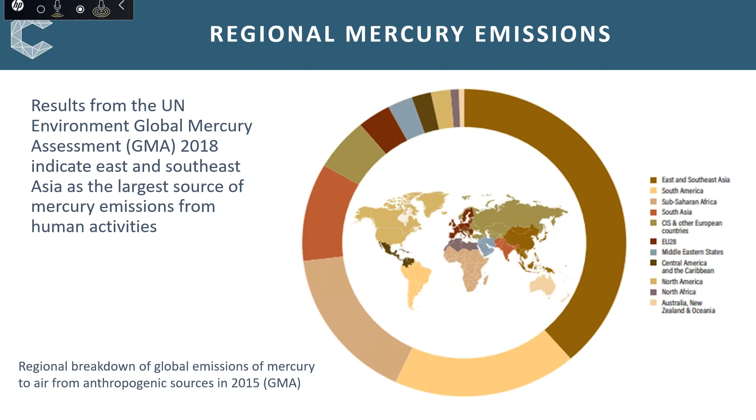And as we can see, emissions are coming largely from Asia, South America, and Africa, because these are the countries where there is most economic and population growth. And this is data, as I said, for all emissions of mercury, not just from coal. If we break it down into each of these regions, East and Southeast Asia, South America, and so on, we can see what are the sources in these individual regions.

And the colour that's catching your eye most is probably that golden yellow colour, and that is the ASGM, the artisanal and small-scale gold mining. And that is appropriate because this is the gold sector. This is individual miners using raw liquid mercury in their hands to collect and mine gold by hand. It's the largest source of mercury worldwide, and because ASGM is illegal, it's hard to get real data on the scale of this issue. But it is estimated that there are still 10 to 15 million people, many women and children, still mining for gold with mercury with their hands.

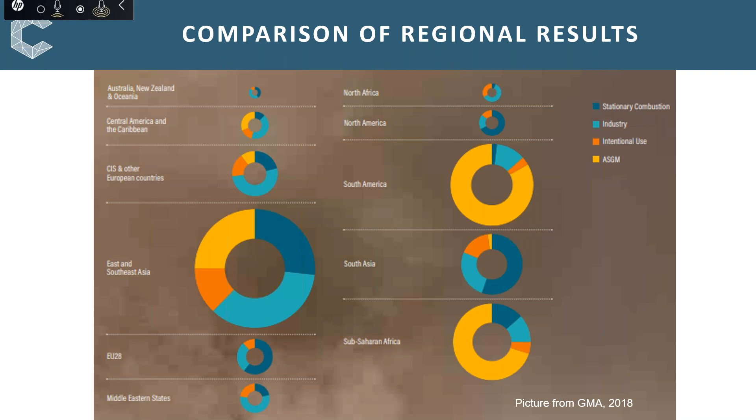The darker orange colour is intentional use. That's light switches and batteries and so on, which is being dealt with under waste and use management. In light blue, we have industry, which will include chlor-alkali and vinyl production, which are being phased out, but also metal and cement production, which I'll talk about a bit at the end of this talk. And that final dark blue chunk, that is the emissions from stationary coal combustion, power and heat, and that's what we're going to focus on today.

But before we do, we're going to ask ourselves, why are we still using coal in the energy mix? Well, demand for energy and electricity is still increasing. There are between 7 and 8 billion of us on the planet, and 1 billion of us or more still don't have access to electricity. Moving these people onto the grid will obviously mean a significant increase in our baseload energy requirements. And this is not demand due to population growth. This is simply getting electricity to everyone who is already here. Similarly, bringing schools, hospitals, stores, industries in line for these emerging regions, that's all going to increase electricity demand.

And then consider those that are moving from traditional cooking fuels. They're using biomass, animal waste, and so on to cook. These are going to be moving onto the grid, whether it be to gas or electrical cooking. And that's 2.8 billion people moving onto the grid for this new need that needs to be cleaned.

And it's not just the emerging regions which are increasing demand for baseload. Consider the example of electric vehicles. If Europe advances to the point where 80% of us have electric vehicles, which is the aim for 2050, then that adds a whole new electricity demand to the grid in our region. That's a whole United Kingdom's worth of power that has to come from somewhere.

So let's step back and look at the energy trilemma. What people are looking at mainly is that top corner, the environment and climate change. Whereas the biggest pull is that bottom right-hand corner, the security of energy supply. People want a secure energy supply, not just so that the Wi-Fi always works, but to keep schools and hospitals and infrastructure working. It's almost like it's one of the basic human rights, access to electricity.

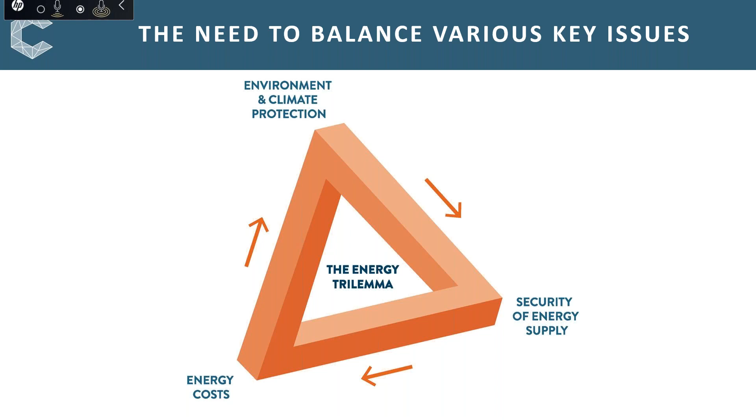If, for example, we look at the World Energy Outlook, I've produced this graph of the perception of the energy issue in different regions of the world. On the left we have the OECD, that's the Western economies, and on the right the non-OECD, the more emerging regions. The x-axis along the bottom is the impact of each of these individual concerns as they're perceived. On the y-axis we have the uncertainty, how much we can evaluate the potential for this to be an effect on the energy trilemma. And the size of the bubble is the urgency.

So obviously it's a very complicated graph. I don't pretend it isn't. And it is included in the new report, so you can look at it at your leisure. But what I want to draw your eyes to is the colours. The green dots relate to the environmental concerns. So, for example, on the left, our emerged Western economies are more focused on the renewable energies, the green stuff. The blue relates to energy equity. Most of us find energy affordable and are perhaps a little bit worried about the electricity prices.

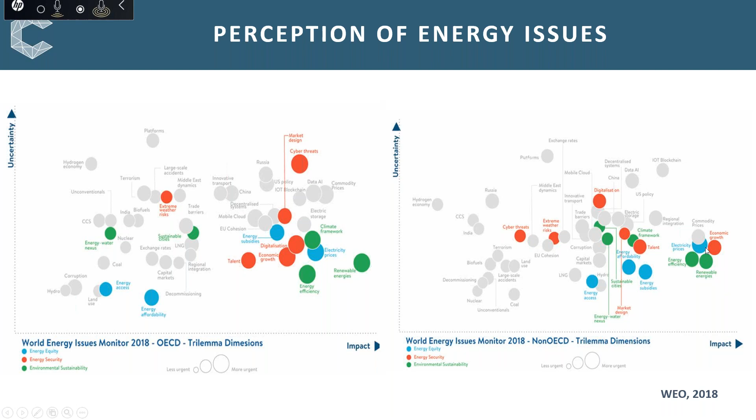And the red, that is the energy security part. For us, probably the most risky ones are things like cyber threats and digitalization. These are sort of advanced concerns. Whereas in the right-hand graph we have the emerging economies. Yes, they do have a green agenda in their mix, but they are most worried about economic growth, and about electricity and the affordability of that electricity. So it's just a good look at how different economies look at the energy trilemma.

And if we get down to the nitty-gritty of the affordability of coal, if we look at the levelized cost of electricity for different sources, such as coal supercritical, lignite supercritical, gas turbine or open cycle turbine, down to nuclear, wind and offshore, the ranges are quite similar. But coal and lignite are much more affordable than wind, offshore and onshore. The ranges are bigger for wind and solar because their success depends very much on where they are and how well they're going to work in that environment.

Yes, batteries would offset that issue. If and when we get batteries working, then the dispatchability and reliability issues of wind and solar will disappear, because we'll be able to capture that energy and use it when we need it. Unfortunately, battery power is extremely expensive and will be for a number of years yet. And there's also the concern of the metals and other materials used in these batteries.

There are flywheel and hydro-type methods for storing power as well. But again, the availability and the affordability of these depends on the region. And when you look at the baseline, coal is affordable.

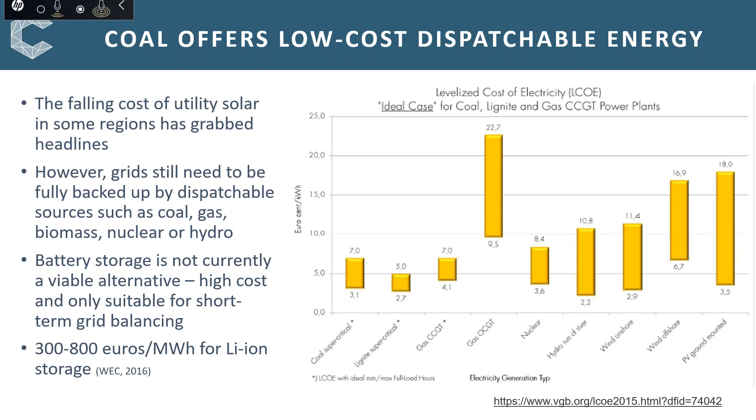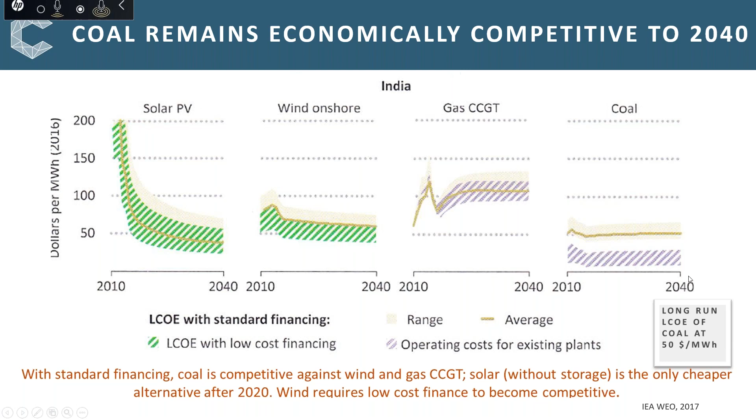So if you are an emerging economy coming online, trying to get power to your existing and expanding population, you're obviously going to be drawn to something that is affordable, reliable, and can be, if done properly, clean. So as I say, it's going to be the fuel of choice for emerging economies in Asia for years to come yet. Can we phase out coal if we wanted to?

Well, in the Western economy, we're certainly trying to do that. This is a graph from Sandbag, an NGO, which has basically summarised what different regions in Europe are doing with respect to phasing out coal. So we see the countries in green, such as the UK and France and most of Scandinavia, have dates for phasing out coal, which are within the next decade or so.

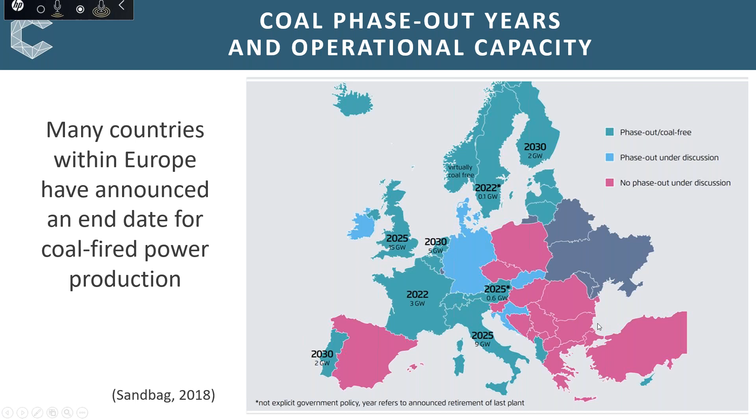And in the broader terms, let's look at countries keeping coal in their nationally determined contributions. These are the heart of the Paris Agreement. These are the long-term goals for each country to reduce national emissions, and to adapt to the impact of climate change. And many of these countries are keeping coal as part of that strategy.

So we have some divestment from coal. We have countries and companies and institutions and banks pulling back from financing coal. For example, the World Bank will only invest in new coal projects under rare circumstances, and I don't believe they've done so for a number of years. There's a potential for a kind of kickback against that, which could be bad news.

For example, if I'm an emerging economy looking to fund a new coal plant, in the past I would have gone to the World Bank. They would have said, yes, you can have funding. However, you must use that funding to build a new state-of-the-art ultra-supercritical plant with all the state-of-the-art control technologies on there. With the World Bank withdrawing that offer, countries are going to be going to banks which may not be quite as prescriptive about the new plant to be built.

And so there is the possibility of new plants being built which are not state-of-the-art, which are dirty, and which are going to be locked into the coal future for 30, 40, 50 years into the future. Now, this implies that everybody's moving away from coal and divestment is huge. Now, as Mo said in his webinar last month, that's not the case. It's a change of where the money's coming from and how much is coming from each of the different regions. And at the moment, a lot of the investment is coming out of China.

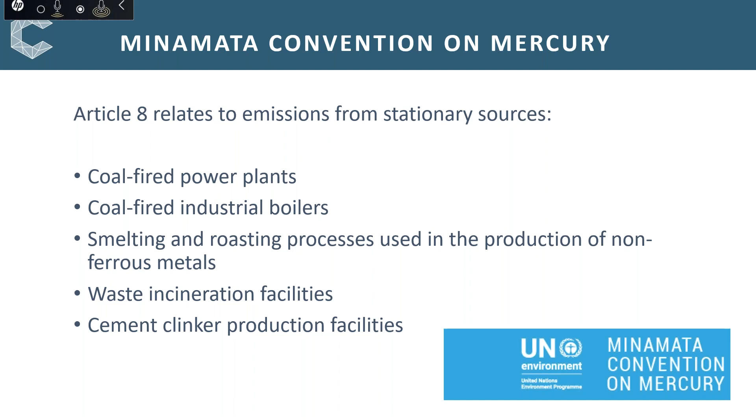Article 8 relates to the emissions from stationary sources, and under that it lists the sources of concern. So we're talking about coal-fired power plants and boilers, smelting processes, non-ferrous metals, waste incineration, cement clinkers, and so on. And what it does, it breaks them down into existing and new sources. New sources we're not going to cover today, because that basically means best available technology as you see it within your country has to be applied to all new plants.

Existing sources are the ones that could be effectively expensive for anyone keeping coal in their energy mix. So a ratifying party to Minamata is going to have to put control technologies in within 10 years of entering the convention. Now, the convention is not prescriptive to any stretch of the imagination. It is basically a guidance of what can be done with suggestions for approaches. So you can use one of the following 5 approaches.

You can use a quantified goal: I will reduce mercury by 50% within the next 10 years. An emission limit value, such as that being adopted in the EU or that has been adopted in China and the USA. The use of best available techniques and practices, which combines basically with emission limit values. Usually you're using one to get to the other. Or, which may be more relevant for emerging economies, multi-pollutant control strategies.

We can't expect new nations that don't have NOx and SOx controls to come in and immediately start worrying about mercury over anything else. What we want them to do is work towards reducing all emissions simultaneously. And finally, there's what's known as the alternative measures, which basically means anything you can come up with to reduce mercury emissions from your coal fleet.

So it's not prescriptive. You can choose any or all of the above, and that's the flexibility and perhaps the advantage of the Minamata Convention, is that it's not prescriptive. You do what you have to do to get your emissions down, as long as you promise to get those emissions down.

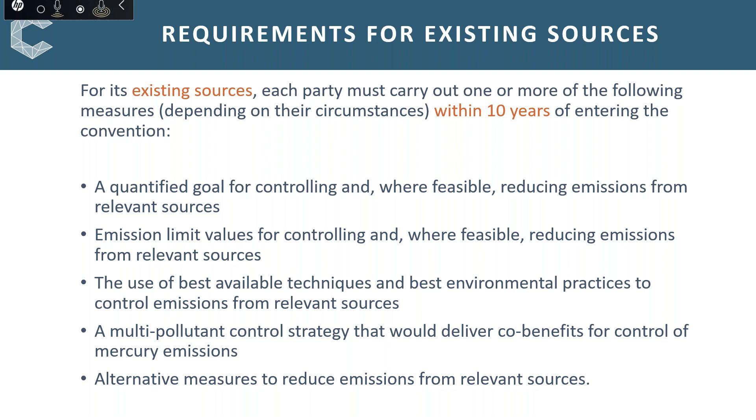So running quickly through the emissions control options, this is where you probably know me and love me from, these diagrams of mercury control in coal-fired power plants. And basically mercury, if it's elemental, will pass through that coal-fired power plant untouched. If it's oxidized, it will stick to unburnt carbon and it will solubilize in any wet system it passes, such as a scrubber. And it will attach to any sorbents it passes also. So ideally we want as much of the mercury in the oxidized form as it passes through this plant as we possibly can to get what we call the co-benefit reduction.

Now, to some extent, oxidation will happen as a result of temperature and activity in the boiler there. Any halogens that are in the coal will help oxidization, as will SCR, the selective catalytic reduction there for NOx control, which can also oxidize mercury and make it nicely sticky and soluble, which means that it will be captured in the fly ash in an ESP, or even better, in a baghouse and in the wet FGD system. There are some re-emission issues with the wet FGD systems, but these can be solved by adding sorbents or oxidants, and oxidants can be added to the coal or into the boiler to oxidize.

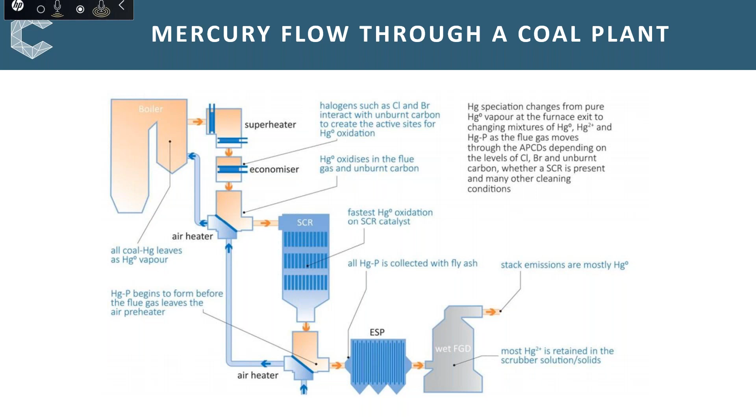And in the perfect situation, this works beautifully as it is, and in a standard coal-fired power plant with SOx and NOx control as we see here, you can expect a minimum of 30% mercury control for free, possibly over 90–95%, but it is very plant and site and coal dependent. So what we try to do is work with the systems that are already there to maximize this co-benefit effect by tweaking the way they work through temperature control, through oxidant addition, or by adding sorbents into the mix. There are many things you can do to maximize your mercury control to get it up to and over 95%.

Now, a lot of people ask us when they're looking at the Minamata Convention, deciding on how to control emissions, what's going to be the cheapest option for me? And I wish there was an easy answer, but there isn't. It is very plant and situation dependent.

It's also location dependent. For example, the cost of activated carbon is going to be very much cheaper in the USA, where it's readily available and there are manufacturers, as opposed to somewhere like India, where perhaps we're not moving into that market yet. And also, it depends very much on your existing plant, whether you have flue gas desulfurization, whether you already have a fabric filter. We have to work with what you have.

So within the convention, we've tried to divide low cost to high cost options. And surprisingly to a lot of people, coal washing is actually quite high. Certainly as expensive as a mercury control option, and it creates a whole new waste stream that we have to worry about. Coal blending is cheaper to do, but it depends on your coal availability. Additives can be cheap, and surprisingly, they do not have as many corrosive impacts on the plant as they used to have in the past.

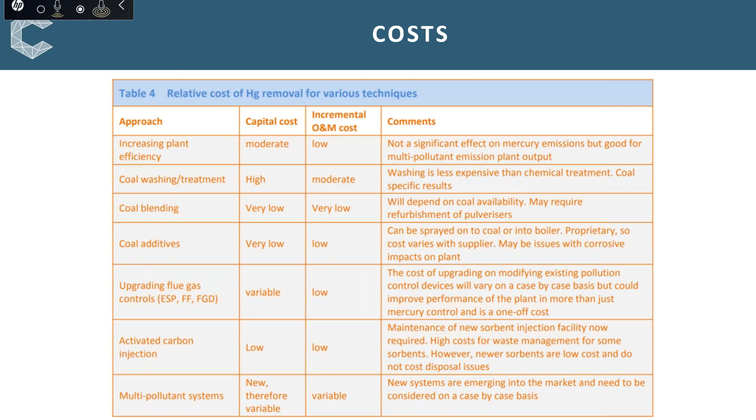You have to use very low quantities of these additives to get the result in many regions, and so corrosion is not as much of an issue as many people think it is. And there are new multi-pollutant systems becoming available and coming online too. All this is covered in the best available guidance documents of the Minamata Convention, which are available in the 6 UN languages and available from the UN website as one-click downloads.

It's quite a meaty document, it's quite technical, and so through the Coal Partnership and the Clean Coal Centre, we've provided this decision tree which helps you work through the options for reducing mercury emissions from coal combustion. So as a plant operator or somebody looking over their coal fleet, you might look down and say, do I have carbon capture and storage? Unless you're Boundary Dam or one of the other ones, no, you don't. Do I have SCR? Yes or no? You follow that flow sheet down with your finger, basically, and it will tell you potentially the best option for mercury control in your situation.

Now, we don't propose for a minute that this should be used by a utility or a plant manager as a prescriptive means of deciding what to do with your plant. But it is a good way of narrowing down and focusing in on the sections of the best available technology guidance document that are appropriate to you.

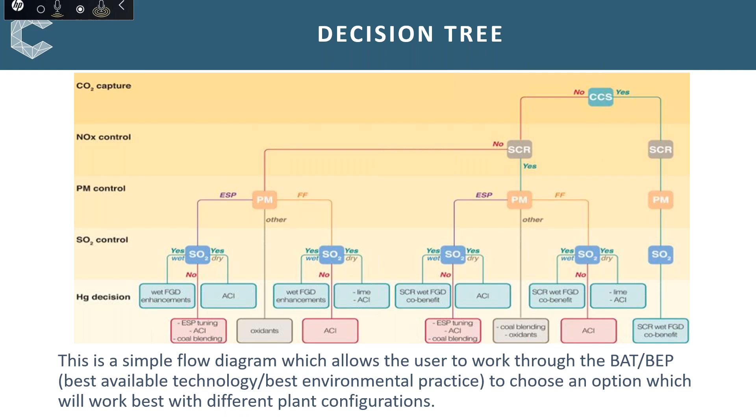Packed behind that simple front screen, there is thousands of data from the information collection request in America. Every single plant had to provide information on mercury in the coal and the balance through the plant, where it came out in the ash or in the stack, as well as the oxidation state. So all the plants in America gave that information. We've also supplemented that with information from studies in China, India, South Africa, Thailand, Indonesia, and Russia. So there's a lot of plant information in there.

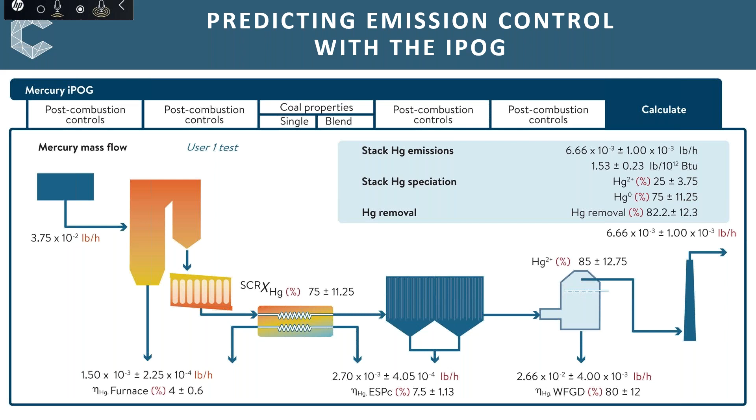We find this extremely useful when we're taking the coal partnership information around the world to emerging regions to show them how simple it is to control mercury emissions through balance of plant changes, but also to let them play with their own data privately if they choose to do so, so that they can get a better feel for what they could achieve and what they can afford to do. And not just even the co-benefit effects. I mean, obviously that's the lowest cost options.

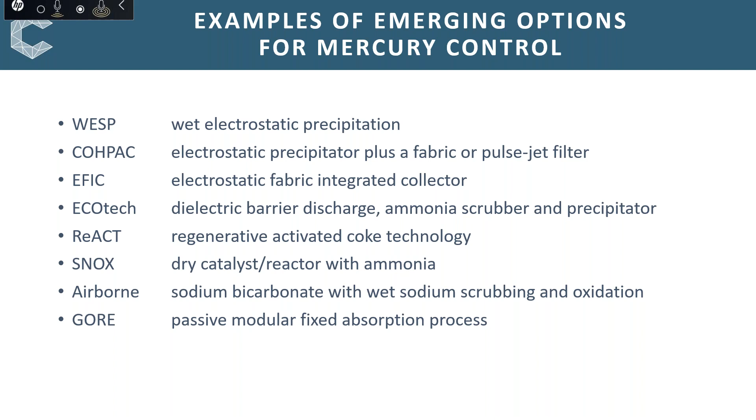There are a lot of emerging technologies out there which I reviewed in a recent report. Just Google mercury control and you will hit all the acronyms in the world and all these new technologies. And the reason why these technologies are still being developed is because people are determined to get to that 100% mercury control. We're almost there, but we need to be there. And so mercury control is going to be needed for decades to come, as I've shown, because coal is with us for decades to come.

And just to prove that it is effective in practice, this is the data from the US in the wake of the Mercury and Air Toxics rule and the ICR, when all the original mercury control options and controls came in. And what we can see, this is for mercury, elemental mercury and oxidized mercury, is that the co-benefit effects have been significant. So the co-benefit effects for SOx control, not so good for elemental mercury because it's not soluble, but huge for oxidized mercury.

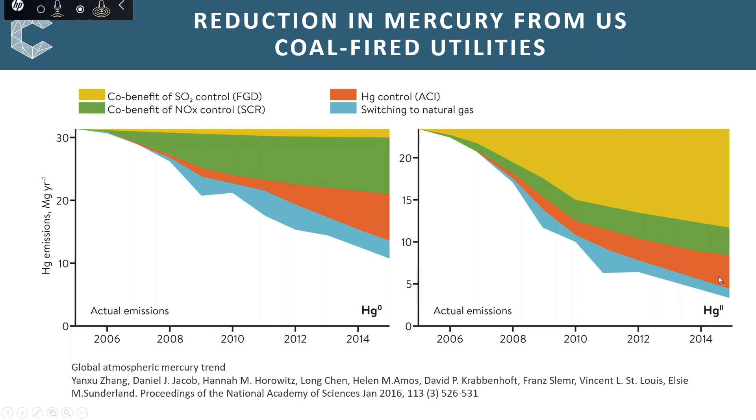For SCR, because that's where elemental mercury is being oxidized, it's significantly effective for oxidized mercury control. So when you add these two together, what we're seeing is, as I've said, the potential for 95% reduction by using existing mercury control systems with that little bit of activated carbon, taking it and guaranteeing it over the 95% for mercury.

So let's quickly end up by looking at industry. It's something we've not really covered at the Clean Coal Centre. We do tend to focus on the larger utilities, but mercury, of course, comes from anywhere that you're burning coal. So coal is intrinsic to some processes, such as cement and steel production. Here we see ferrous metal production, that's steel.

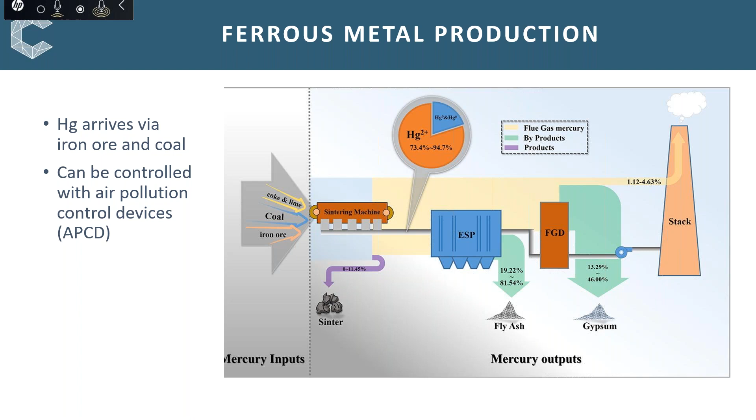What I'm saying is that because coal is going in there, it's coming out. The mercury is behaving exactly the same way it would in a coal-fired power plant. So we're seeing oxidized and elemental forms, and we're seeing that potentially being captured in the fly ash or the gypsum or going out of the stack. It's all controllable in the same way. The issue with industry is that it's an economy of scale. A lot of these processes are smaller and perhaps coming under the radar for some legislation. But of course, it can be done and it should be done.

Cement manufacture, again, something we've not really covered, a major source of CO2 emissions, never mind mercury emissions. And the mercury is coming in through raw materials and fuels, including the coal. Again, sorbents, co-benefit effects for NOx and SOx control can work. There is an issue with dust shuttling. It's a lot of moving solid material around in a cement plant, and that can lead to a build-up and a concentration of mercury in a solid form, which is not good because it can lead to re-emission issues.

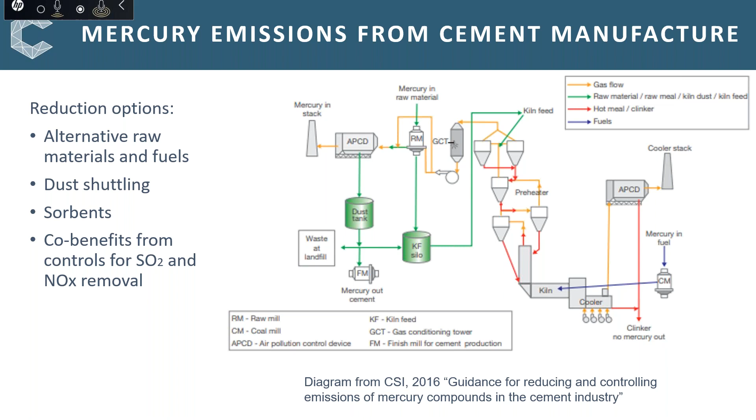And this is dealt with in this excellent article that I've referenced down here that I suggest you go and see if you want to know more about cement manufacture and the potential for mercury control. It's all doable. It's the economy of scale.

And these are data from China when we're looking at different metal production. So this is the non-ferrous metal. And what we see again there is the air pollution control devices, the APCDs, and acid options. These are using technologies, co-benefit effects, or putting in new technologies for acid gas removal, scrubbing, or particulate control.

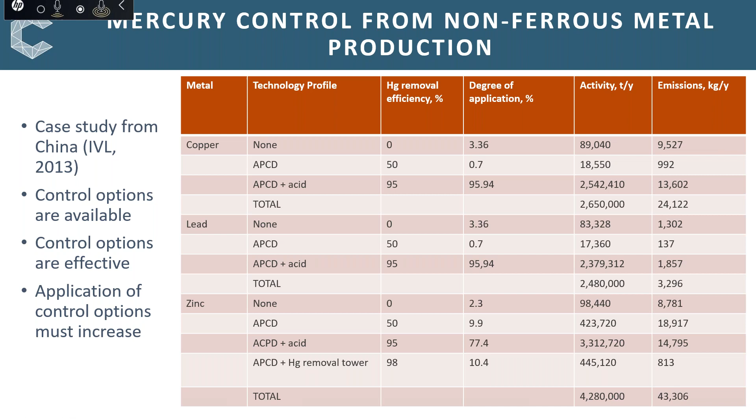So can't we just phase out these industries? Well, yes and no. Because steel requires carbon in there, you're going to have to put coal in there. And so there are a lot of industries, including steel, which require coal until somebody comes up with a better way of producing something, that material, or something equivalent to that material.

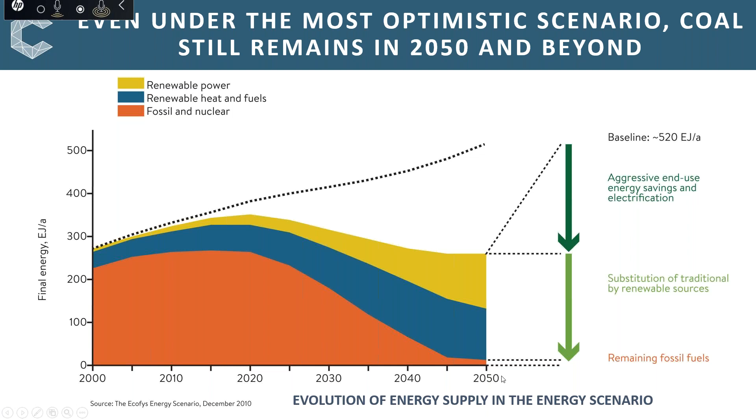And this is the ECOFYS World Wildlife prediction for taking coal out of the energy mix by 2050. So this is not what's going to happen. This is kind of best case scenario. This is an optimistic prediction for getting rid of coal by 2050 using aggressive end-use energy savings in electrification and by substituting almost everything with renewable sources. And even under that, the most optimistic scenario ever, fossil fuels will not be completely gone by 2050 because there are some instances where they currently simply cannot be replaced.

There's also the locked-in effect. Even if we stop building coal-fired power plants and industry right now, unless somebody comes up with an alternative, they're going to keep running until they're not needed anymore. And so the lifetime, as I said, of a coal-fired power plant can be up to and over 40 or 50 years. For iron and steel manufacturers and cement kilns, you're talking about maybe 20, 30 years.

These are challenges that we're going to face even if we stop using coal now, even if we stop building any more coal plants and stop using coal in industry. We have a legacy of coal issues and emissions to deal with, and that's why we have to continue to look at emission control strategies in the long term.

So to conclude, coal is going to remain part of the energy mix as it's reliable and affordable, and it's currently there. And even if we don't build anything new starting now, we have a legacy that must be dealt with responsibly. There are new technologies that have been covered in a lot of recent reports from the Clean Coal Centre, which show that mercury control can be achieved by 95% or more, and new systems are coming online daily to get that down to zero or near zero.

And there's also the new coal systems, the new gasifications, the fuel cells, the Allam cycle that we covered in recent reports as well, that offer the ultra clean, if not zero emission option for coal that we're all working towards.